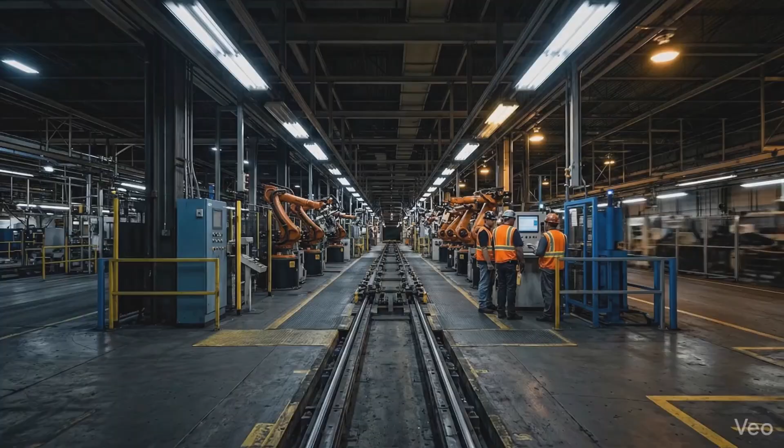In 2021, automakers couldn't build cars. Hospitals waited months for medical equipment. Game consoles sold for 3 times their retail price on secondary markets. All of it traced back to a single miscalculation, a rounding error, really. But here's what that crisis revealed.

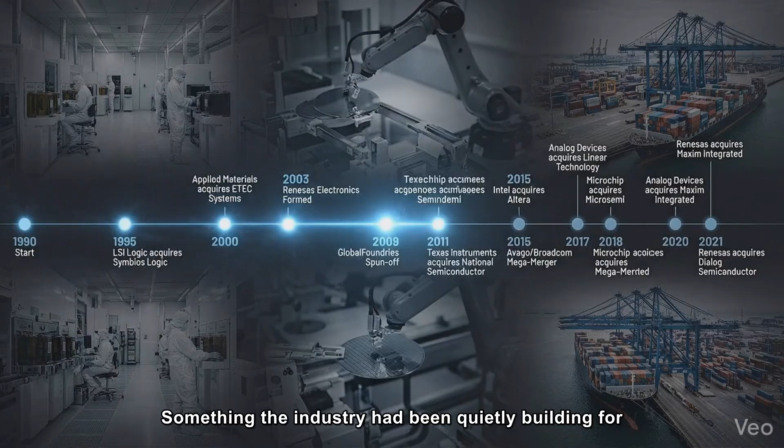Something the industry had been quietly building for 30 years. A supply chain so concentrated, so geographically fragile, that a single earthquake, a single political decision, a single factory fire could end the modern world as we know it.

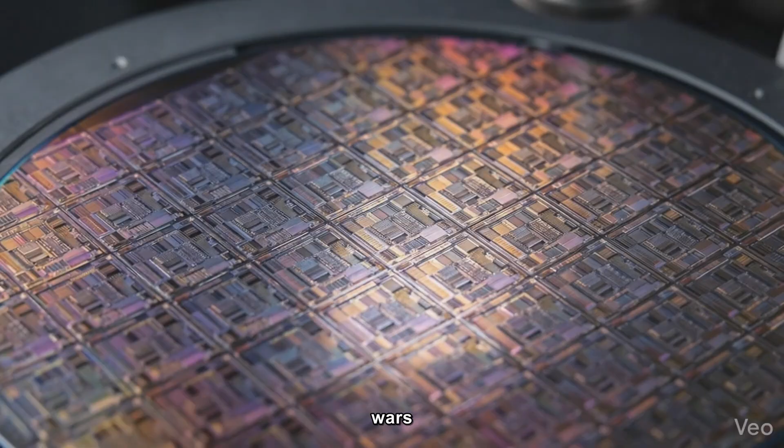This is Noh Tech, and this is the truth about chip wars and supply chain fragility.

For most of the 20th century, the story of global manufacturing was a story of spreading risk. The logic was simple: build your supply chain across many countries, many suppliers. If one failed, another stepped in. Redundancy was the whole point. Economists called it comparative advantage. Countries specialized in what they did best, and global trade stitched it all together into something resilient.

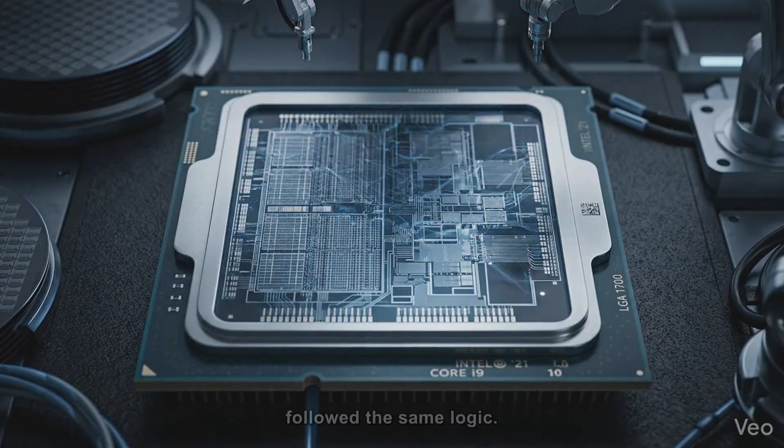And semiconductors, we assumed, followed the same logic. Multiple manufacturers, multiple countries, multiple nodes, a genuinely distributed system. Surely no single failure could bring it all down.

I believed this too. It seemed obvious. The chip industry was global, sophisticated, worth trillions of dollars. Of course it had built-in redundancy. Of course it had backup plans.

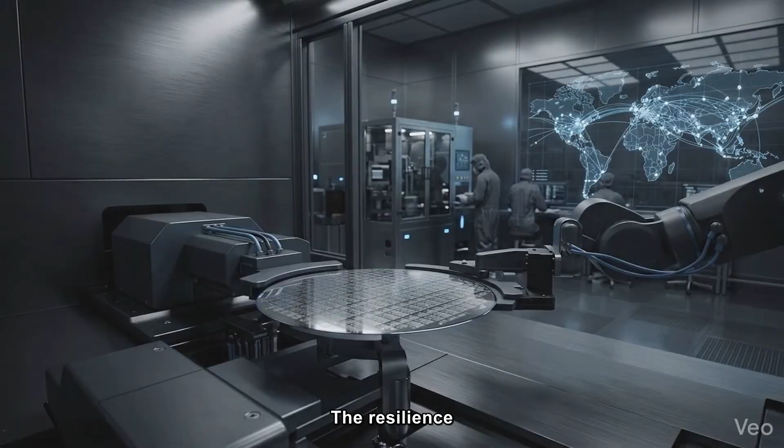Then I started looking at what the industry actually produces and where, and the picture looked nothing like what I expected. The resilience was an illusion. The redundancy didn't exist, not where it mattered most.

Let's go back to early 2020. The pandemic hits. Automotive manufacturers look at their sales forecasts and make a reasonable call: people aren't buying cars during a global lockdown. So they cancel their chip orders. Not all of them, just a small reduction, 2 to 3% off their projected demand for the year. Here's what they didn't account for.

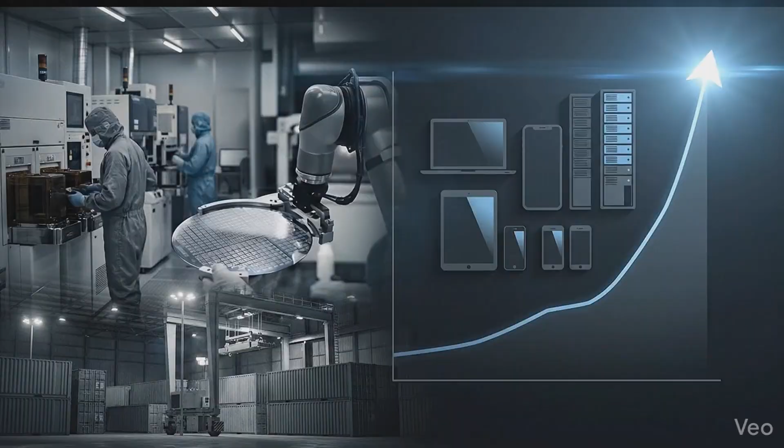The rest of the world was also at home, buying laptops, buying tablets, buying game consoles, upgrading home office equipment. Consumer electronics demand didn't drop, it exploded upward. Chip fabs, which operate at near-perfect capacity all the time because the economics demand it, simply redirected their production. The automotive allocation disappeared into consumer electronics orders within weeks.

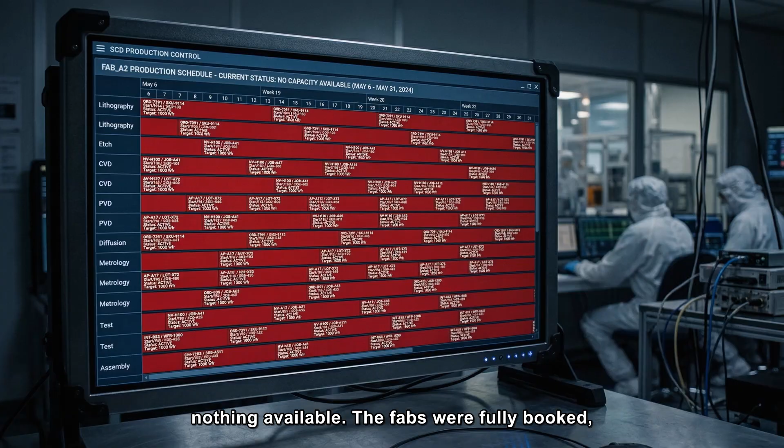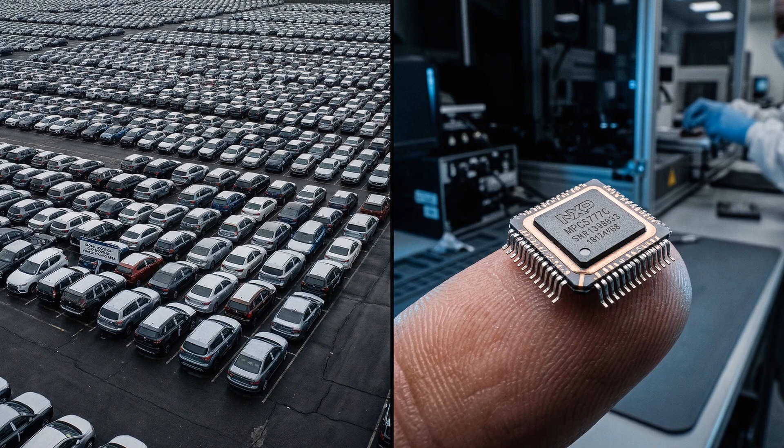When car sales rebounded faster than anyone predicted, automakers went back to their chip suppliers and found nothing available. The fabs were fully booked, months out, in some cases years out. The result? Ford shut down production lines. GM idled plants. Volkswagen, Toyota, Stellantis, all of them sitting on half-finished vehicles, waiting for microcontrollers worth a few dollars each. The automotive industry lost an estimated $210 billion in revenue.

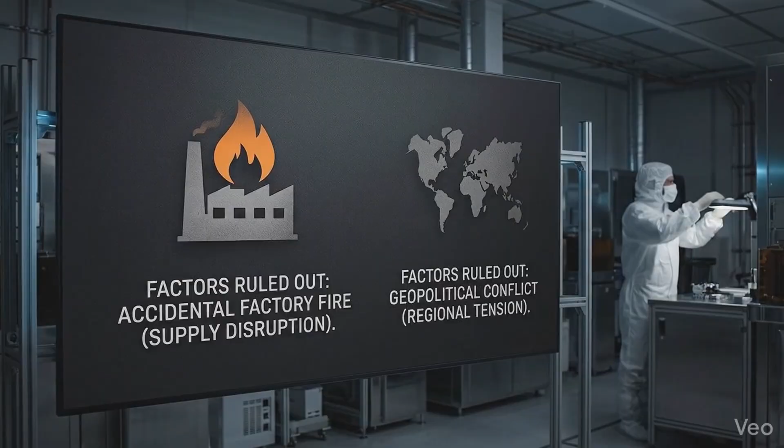Not from a cyber attack, not from a natural disaster, not from a factory fire or a geopolitical crisis, from a 2 to 3% demand miscalculation at the start of a pandemic. But this raises the obvious question: why was a system worth trillions of dollars so brittle that a rounding error could shatter it?

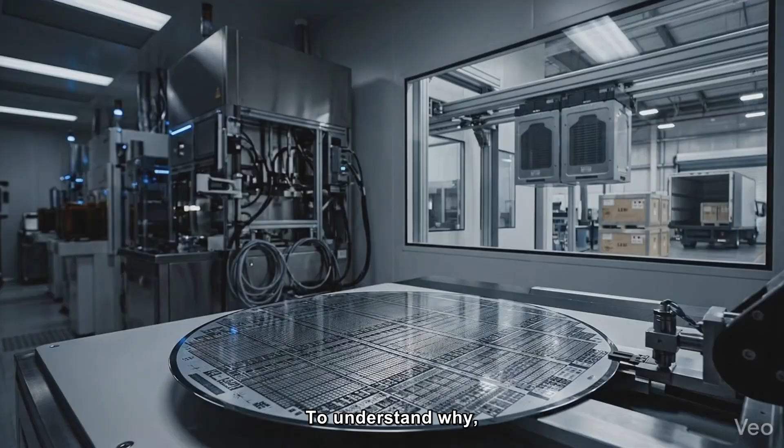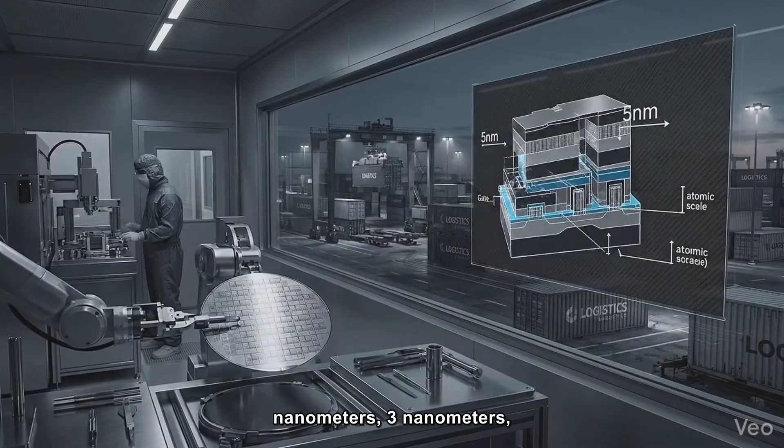To understand why, you need to understand what it actually takes to manufacture a modern chip. A chip at the leading edge today is built at 5 nanometers, 3 nanometers, 2 nanometers is coming within the next few years. For context, a strand of human hair is roughly 23,000 times wider than a 3 nanometer transistor. We are patterning features onto silicon at a scale smaller than most viruses.

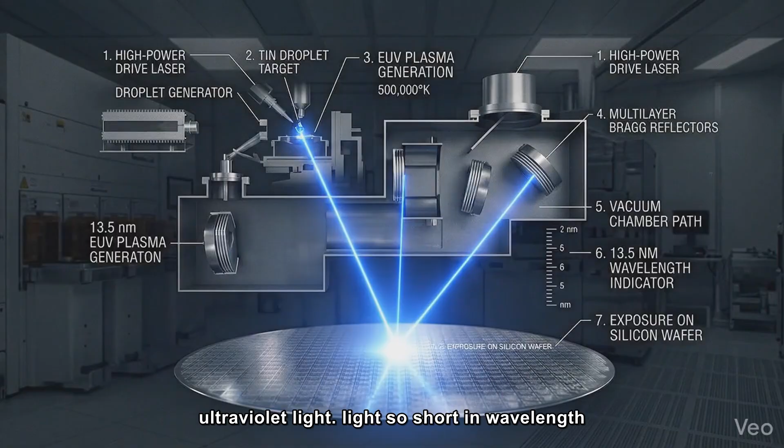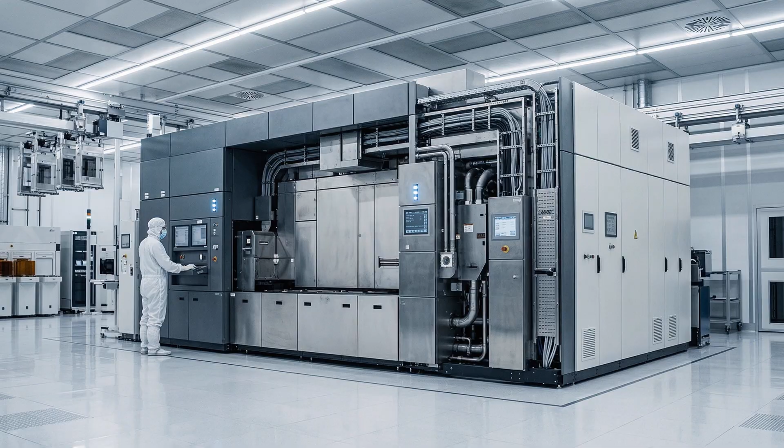To etch features that small, you need a machine that produces light at 13.5 nanometers, extreme ultraviolet light, so short in wavelength that air itself absorbs it. The entire optical path has to run inside a vacuum. There is exactly one company on Earth that makes these machines: ASML, a Dutch company headquartered in Veldhoven in the southern Netherlands. Their EUV lithography system is one of the most complex manufactured objects human beings have ever assembled.

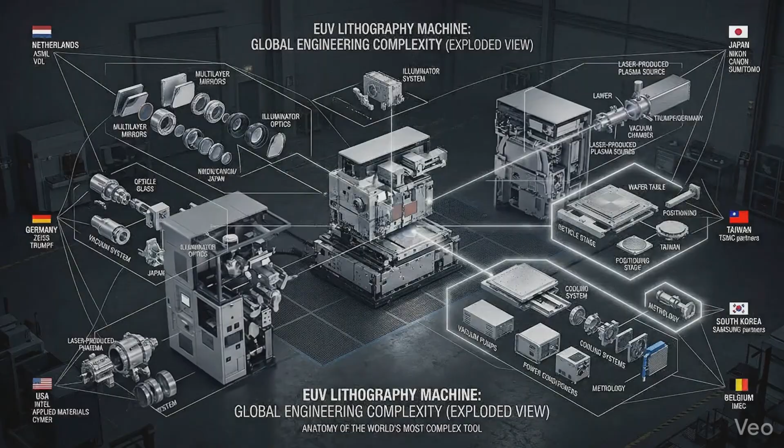Each machine contains over 100,000 individual components sourced from suppliers across the globe. It costs between $150 and $200 million per unit. And ASML produces approximately 30 to 40 of them per year, for the entire planet's semiconductor industry.

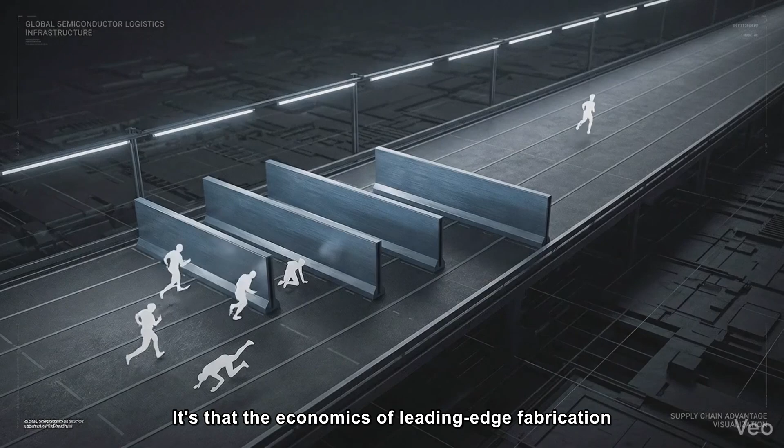That constraint, physical, economic, and rooted in the fundamental physics of light, is why chip manufacturing concentrated the way it did. It's not that TSMC got lucky. It's that the economics of leading-edge fabrication reward whoever gets there first and punish everyone who tries to catch up.

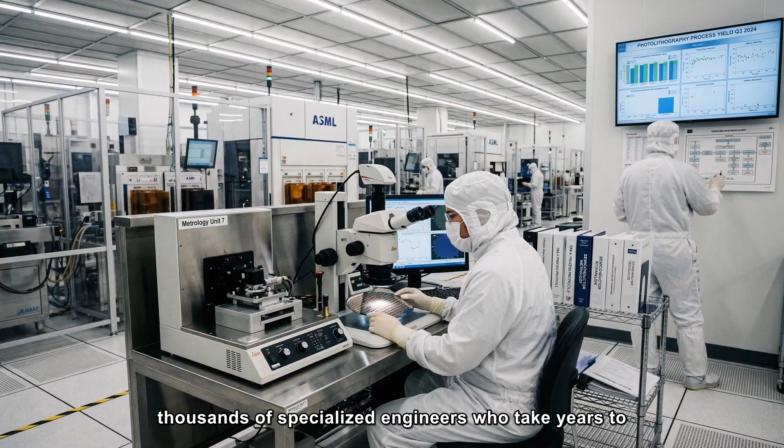Building a leading-edge fab isn't just expensive. It requires decades of accumulated process knowledge, thousands of specialized engineers who take years to train, relationships with hundreds of suppliers across dozens of countries, and allocation from those 30 machines per year, which are already spoken for years in advance.

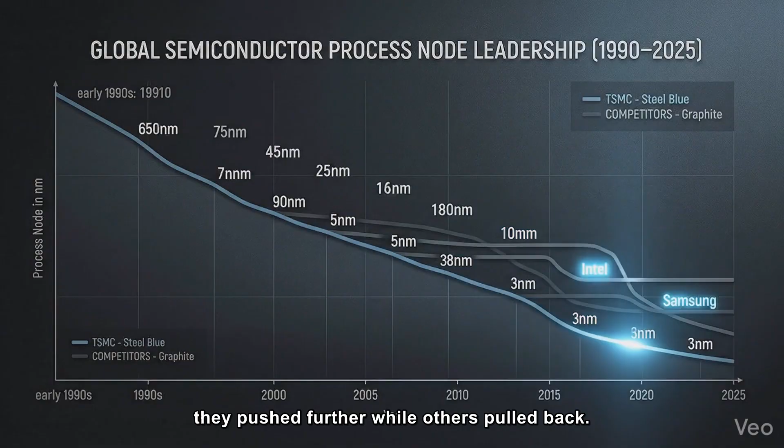TSMC didn't dominate because of luck or geography alone. They dominated because they invested earlier, deeper, and more consistently than any competitor. For 30 consecutive years, every process generation, every node shrink, they pushed further while others pulled back. And by the time the rest of the world noticed how concentrated the industry had become, the physics made it nearly impossible to catch up quickly.

Each new generation of chips doesn't just require more money. It requires more specialized knowledge, more precise equipment, and more of those 30 machines per year that ASML is already struggling to produce fast enough.

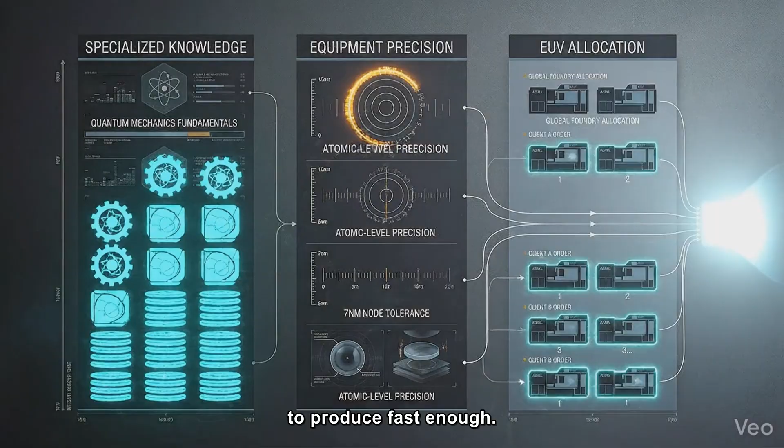The concentration wasn't a conspiracy. It was the natural outcome of a technology that rewards scale, punishes redundancy, and makes catching up exponentially harder with every passing year. Here's where most people get the story wrong.

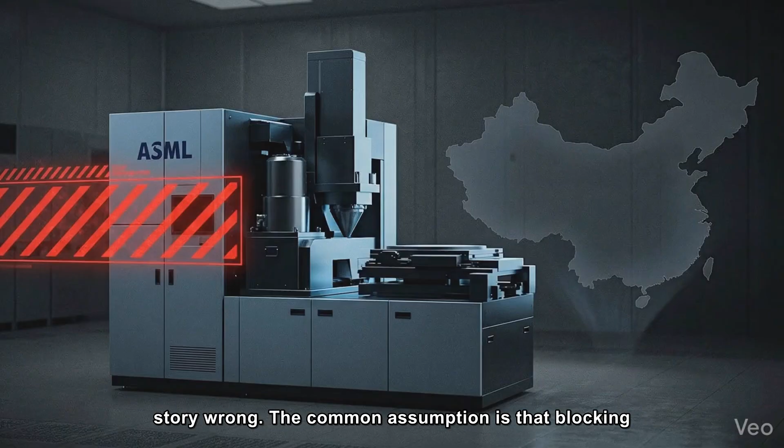The common assumption is that blocking China from accessing ASML's EUV machines effectively froze China's semiconductor ambitions, that the export controls worked, that the choke point held.

They didn't. Not entirely. In 2022, China's SMIC, its largest domestic chip maker, was reported to have achieved 7 nanometer class chip production without a single EUV machine.

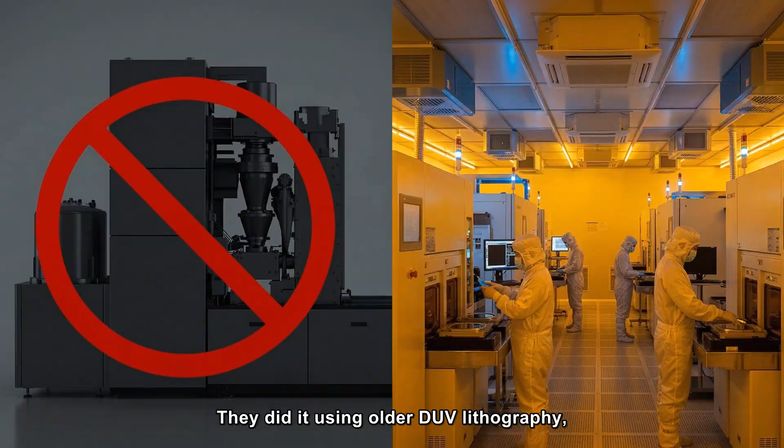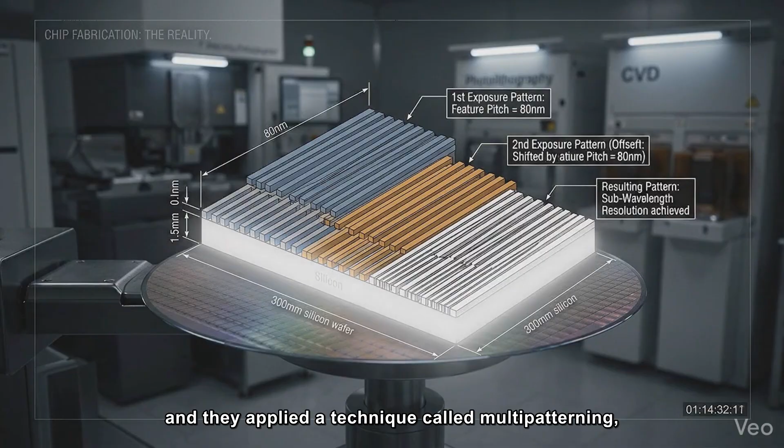They did it using older DUV lithography, deep ultraviolet machines that ASML had already sold to China before export controls tightened. And they applied a technique called multi-patterning, exposing the same silicon layer multiple times with precise offsets, stacking exposures to achieve finer features than any single pass allows.

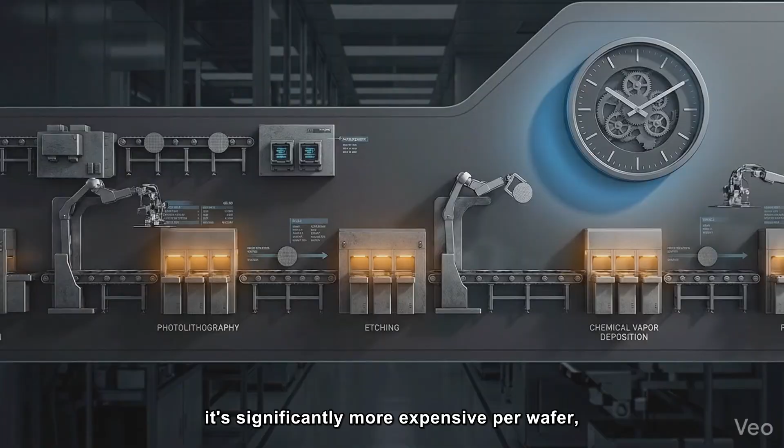It's slower, it's significantly more expensive per wafer, and yields, the percentage of chips on each wafer that actually function correctly, are substantially lower than what TSMC achieves on equivalent nodes.

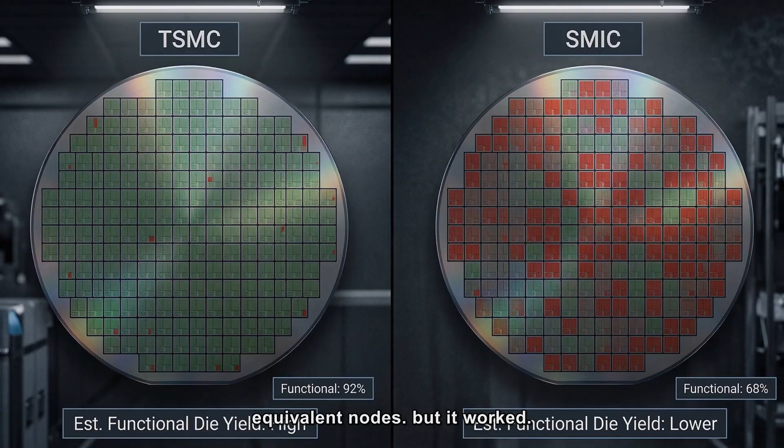But it worked. China built 7 nanometer class chips anyway. The Huawei Mate 60 Pro shipped with one of them inside, a phone that wasn't supposed to exist, running silicon that wasn't supposed to be possible.

This is the uncomfortable truth about the export control strategy. It slowed China down. It raised their costs. It reduced their yields. But it didn't stop them from making progress, and it revealed something important about the nature of technological choke points. They're more porous than they appear.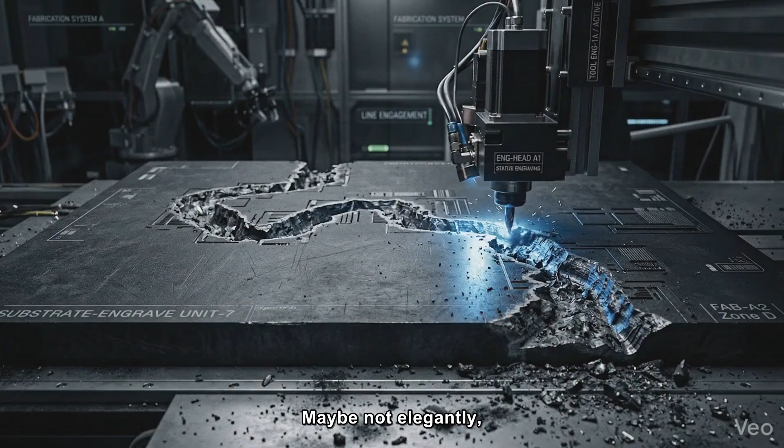Given enough time, enough capital, and enough engineering talent concentrated on a single problem, constraints get worked around. Maybe not elegantly, maybe not efficiently, but they get worked around.

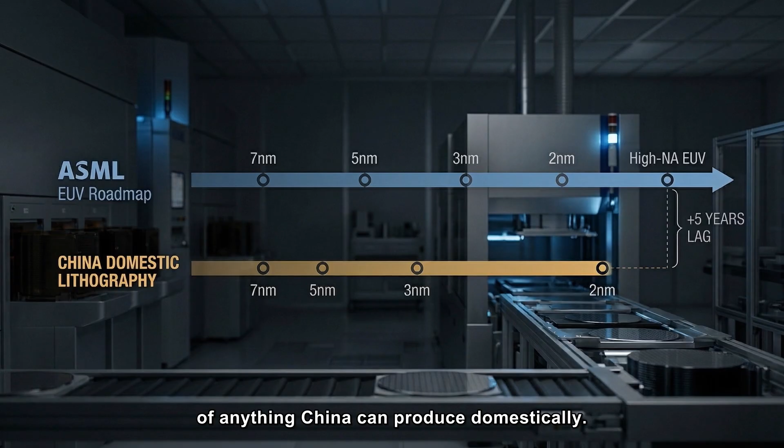The EUV monopoly remains real and significant. ASML's machines are still years ahead of anything China can produce domestically. The gap in yield and efficiency is meaningful. But the assumption that a single export control on a single category of machine could freeze an entire nation's technological trajectory, that assumption was wrong.

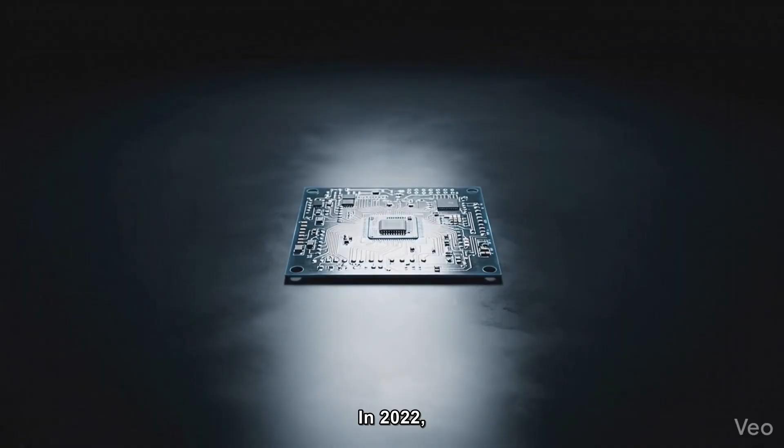So where does that leave us? In 2022, the United States passed the CHIPS and Science Act. $52.7 billion allocated to rebuild domestic semiconductor manufacturing and research. The largest industrial policy investment the US had made in a generation.

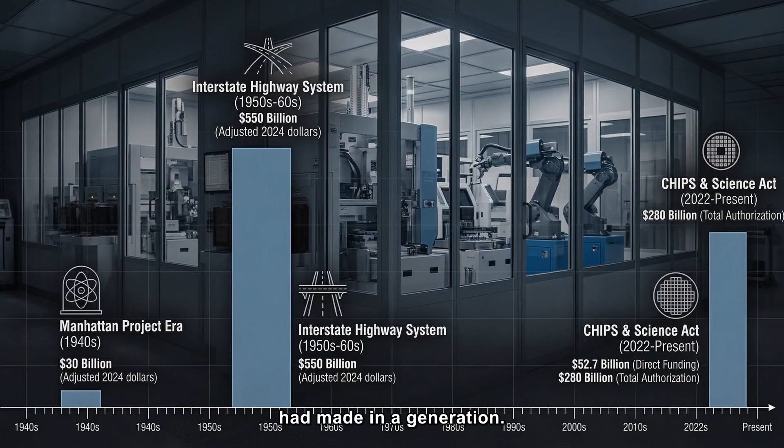Industry analysts estimate that building a genuinely competitive leading-edge fab ecosystem, one that could meaningfully reduce dependence on Taiwan, would require $500 billion or more, sustained over a decade. 52 billion against 500 billion. That gap is the real story of chip geopolitics.

Not the speeches, not the ribbon cuttings. The gap between what was funded and what would actually change the physics.

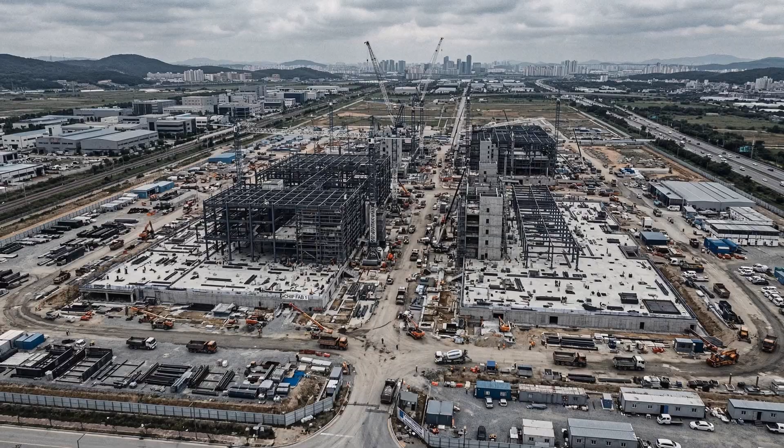The CHIPS Act matters. Intel is building fabs in Arizona and Ohio. TSMC itself is constructing facilities in Phoenix. Samsung is expanding in Taylor, Texas. These are real investments with real long-term consequences.

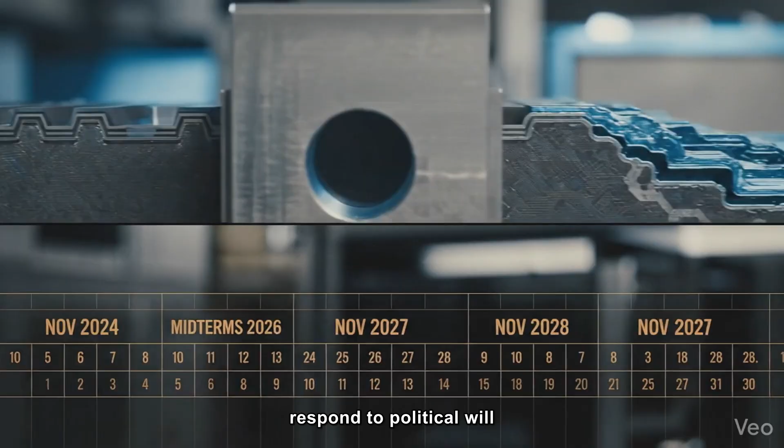But the physics of leading-edge fabrication doesn't respond to political will on a political timeline. Each new generation of chips requires years of process development, billions in equipment procurement, and the kind of institutional knowledge that takes decades to accumulate. Knowledge that can't be hired or legislated into existence on an election cycle.

Meanwhile, Taiwan remains the center of gravity. TSMC continues to push toward 2 nanometers and beyond, and the Taiwan Strait, the body of water separating Taiwan from mainland China, roughly 130 kilometers wide at its closest point, remains one of the world's most geopolitically sensitive regions, its importance rooted not in contested claims over the waterway itself, but in the unresolved question of Taiwan's political status and the extraordinary concentration of semiconductor power sitting on one side of it.

This is the fragility we built. Not through malice, not through incompetence. Through 30 years of individually rational economic decisions that, in aggregate, created a single point of failure for modern civilization, and then bet the entire global economy on its continued stability.

The 2021 chip shortage wasn't primarily a warning about demand forecasting. It was a warning about what happens when efficiency becomes the only goal. When every redundancy is stripped out because redundancy costs money, and the market never prices in the risk of catastrophic failure.

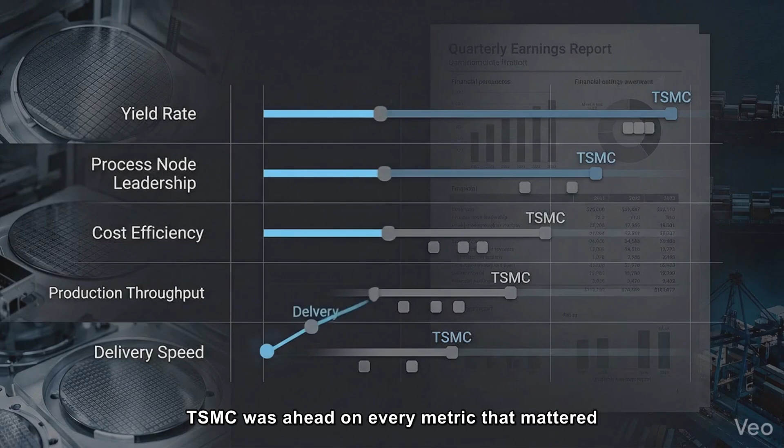Every decision that concentrated chip manufacturing in Taiwan made economic sense at the time it was made. TSMC was better. TSMC was cheaper. TSMC was ahead on every metric that mattered to a quarterly earnings report. So the world gave TSMC more business, and more, and more.

Until one company, in one country, on one island separated from a geopolitical flashpoint by a strait roughly 130 kilometers wide, controlled the technological future of 8 billion people.

This reminds us that resilience and efficiency are not the same thing. They are often opposites. And for 30 years, every time we had to choose, we chose efficiency.

But the chip supply chain isn't the only place we've made that trade-off.